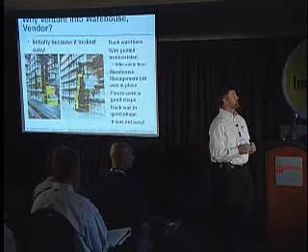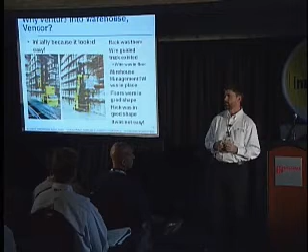Why did we do it? The exclamation point up there was true. It looked easy. It really did. It looked like something that we could just stick an AGV in, and away we go. This was our third system, by the way.

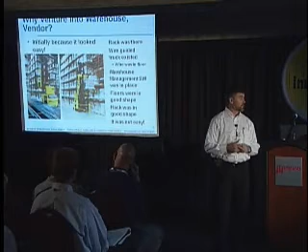Went in about 1999, and you're going to see that one as part of the user presentation here in the end, user profile. But we saw it and we said, wow, the rack aisles are perfect, the floor is perfect, the racks are perfect. At least that's what the customer told us. And we got in and we started doing this, and we said, hey, you know what? The floor's not perfect, and the rack's not perfect. And everything else wasn't necessarily as good as we thought it was.

So we were very excited. We rushed in and we did this project, and it was successful. But unfortunately, there were things that we didn't consider, things that we couldn't have foreseen. How to check racking to make sure it's absolutely perfect without checking every location.

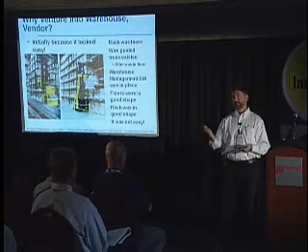Let me tell you a little bit of something about an AGV system. In a general horizontal transport system, we pick product up one location, might take it to 5 locations. We have some Miller folks in here. We pick from 13 or 14 locations and take to maybe not that many, bunch of floor locations. That system got 15,000 drop locations.

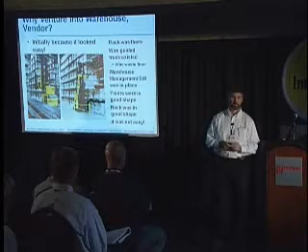We didn't have the tools in place when we did this. Sure, it looked easy. We had to check every position. We had to manually check every position. It took weeks to check that system out. It took on the order of a month to get it to a point where it was functioning reliably because we had to check every location.

So it wasn't easy. So now, we started to look at it and we said, we did this first project, we did the second project. The second project you're going to see is the second user profile, which is a little more exciting than the first, but I don't have the return on investment numbers that I have for the first one.

And we said, what did we not know? How could we get past the situation that we didn't know? Because if you've got a warehouse, what's the last thing you want me to tell you if you say, this is a great application, come in and talk to me about it, and I come in and say, well, the equipment costs all this, but we got to tear all your rack down. But you got to flatten your floor out. But you got to do this, you got to do that. It starts to add up, and those are costs that you don't see.

So what we did is after that first system of this type, we started to look at what do we need to do. So, of course, get a little feedback. Of course, it's evolved to the point where, of course, more powerful controls. What does that mean and why? Why is it important? It means that now we're actually using, let's call them leading edge PC technology.

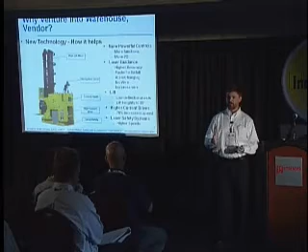We're not using bleeding edge PC technology because it costs a fortune. But with more powerful controls comes laser guidance. Now think for a moment if we're going to put this type of equipment in your warehouse and you say, put it in this warehouse, we're running existing VNA trucks. You say, no problem, if you've already got a wire cut in the floor. Anybody got VNA trucks with narrow aisles with wire guidance?

A lot of people do. That's great. I mean, it works day in, day out. From a guidance standpoint, it's one of the best that you can have. It really is. Problem is, you're going to change it, which you probably aren't, but if you're going to change it, you've got to recut the floor.

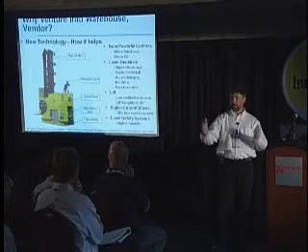So we looked at this and we said, well, what do we have to do to really be proactive with someone who might say, you know, I'd like to move this equipment to a new warehouse. It's a greenfield warehouse, but I don't want to buy really an ASRS. Maybe that just doesn't fit. Maybe I don't want to build a building. Maybe you don't have the space for it, or maybe you have so much space that an existing building with standard post and beam racking is the right fit for you.

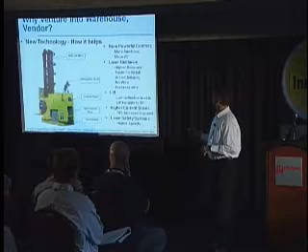But if you're going to rent or you're going to lease that building and you have to cut the floor, the owner of the building says, oh my God, I don't want you cutting my floor up. Okay, no problem. Laser guidance. We actually have found a way to use our laser guidance to be able to put these systems in without actually having to cut the wire into the floor.

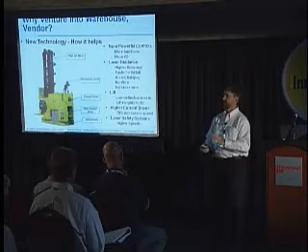The benefit for everybody is that now you can take it, move it from warehouse to warehouse. These vehicles change from aisle to aisle without having to have any guidance, any rail, anything at the ends of the aisles, so they can move from one aisle to the next aisle to the next aisle, and you find that from a flexibility standpoint, it's fantastic. It really is. We don't have to check a lot of stuff anymore. The other thing is, for us, it's faster to install. So if it's faster to install for me, what does that mean to you? You got it.

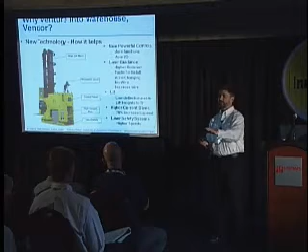It's less expensive for you as well, so your return on investment starts to happen a lot quicker. Honest to goodness, that's a good thing that happened because of that. It's less expensive for you, but for us, it's imperative.

We need to get in and be able to put the system in quickly, get it up and running very quickly, and our laser guidance allows us to do that. This laser we use is incredibly accurate - as a matter of fact, the vendor's here somewhere.

It's a fantastic piece of equipment with such high resolution that it allows us to guide in these rack aisles. You might ask, well, big deal. You couldn't do that in the past with laser guidance because the guidance systems weren't accurate enough in angular resolution to tell the difference in angle in a very narrow aisle at a long distance. Does that make sense?

If I put laser targets along these walls, the laser works line of sight, so I'm looking at the targets, calculating the angles to figure out where I am. I've got these huge angles, but if I bring it back down into this narrow aisle, my angles look like this, all the way down.

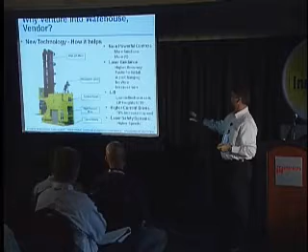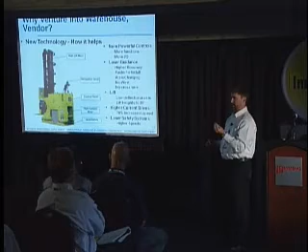Laser technology has progressed to a point with this new laser - and the laser's been around a long time, that company supplying these lasers to AGV companies for many years. But it has allowed us to now implement laser guidance in these aisles, which we didn't have the opportunity to do before. When you see these user profiles, you see these are all wire guidance. So the technology has advanced to a point where it's much easier for us.

Lift - why does that matter? Let me tell you why. We did a study recently, brought in some consultants, and asked them what do most post and beam warehouses look like? Does anybody have a guess how high the ceiling height in most of them are? It's about 35 feet.

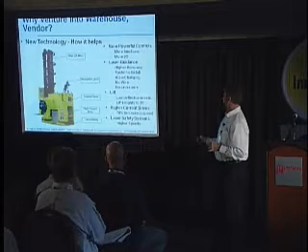Our mast goes to 35 feet, which means if we go all the way up, we're probably going to hit the ceiling, so it's not a big deal there. But at least now we can hit the greater majority of the top rack positions in these warehouses. We didn't have that alternative before.

You'll see before what we did is we actually used a standard Hyster turret truck, and you'll see that in the presentations before. We thought, based on using that design of vehicle, knowing how rugged they are - the guys with VNA trucks, how rugged are they? They work pretty well? Yeah, just a standard man aboard, everything seems to work.

They're pretty rugged, right? What we found with our systems running 24/7 is over time they tended to wear in areas that we didn't really see in AGVs, because they're not designed to be operated 24/7 like these systems are. So the design of the lift and the drives, as well as the safety systems, have allowed us to branch out a lot further.

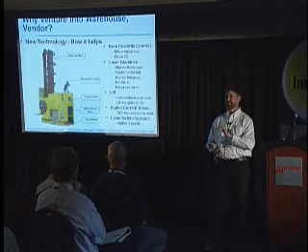This right here is a big thing - the higher current drive means absolutely nothing to you, but Mats Herströmer, anybody know Mats Herströmer? A couple of you do. Well, he's our chief technology officer, and he has put in higher current drives. You know what that means? It means that now we can run about 350 to 375 feet per minute. That's a really big deal because we couldn't run that fast before.

Typical AGV systems max out at 200 feet per minute. These vehicles run 350 to 375, and in the world of AGVs that's scary fast because you can't outrun it. You can outrun it if you got a head start, but if it sneaks up on you, it'll get you.

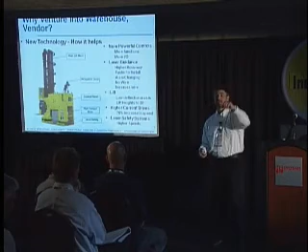So, laser safety systems - you'll see those in the back there, one of our vendors is back there, we use their systems for laser safety. The benefit is in a very narrow rack aisle we can set the profiles out 30, 40 feet. So as a vehicle sees something in a rack aisle, it can start to slow down as it approaches. If it's smart enough to run out of the way, it'll keep going. If it's something in the aisle, it'll stop. We didn't have this technology before.

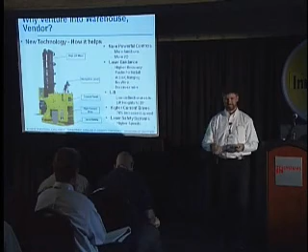Some of you guys with older AGVs probably remember plastic bumpers. Remember those? You remember what a pain in the butt they were when they broke? They run into something, the bumper works great, the vehicle stops, but the bumper breaks. What do you do? You got to replace the bumper - not all the time, but certainly sometimes.